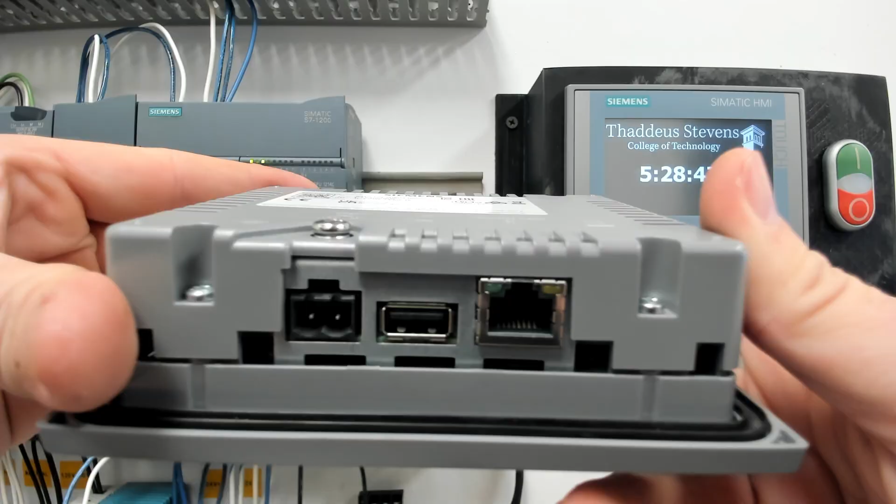So to work with this HMI, we basically need two things. We need power and we need network. The USB function is for updating things on the HMI, pulling the program off. But we need a positive and a negative 24 volts, and we need an Ethernet. So that's the wiring there. You can see I have my wiring, my 24 volts coming up to here. I also have an Ethernet cable.

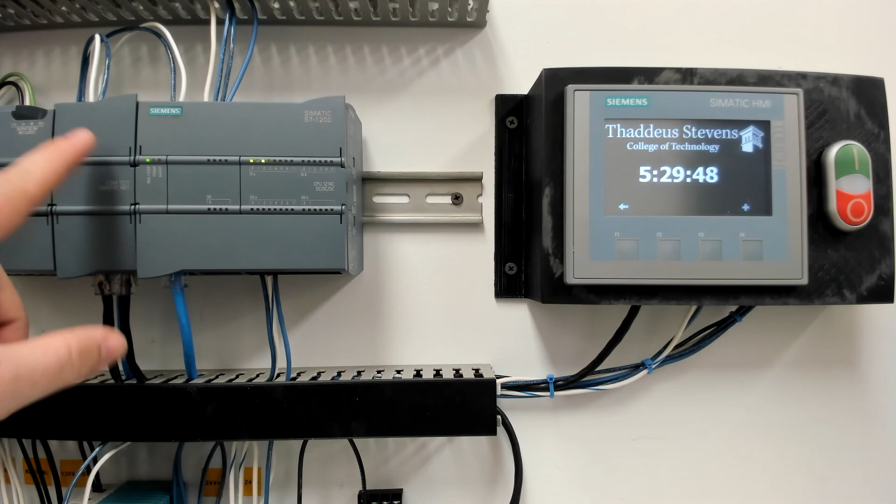You will have to have some sort of Ethernet switch, or else you'll be doing a lot of plugging and unplugging. Our PLCs we have in class only have one Ethernet port on the front of the PLC. So if you have that going to your HMI, you have no way to communicate, no way to plug your laptop in. So grab yourself one of these CSM 1277 Siemens network switches. That way it gives you a bunch of ports. You can plug your PLC, your HMI and your computer with one spot left over, and you don't have to plug and unplug everything.

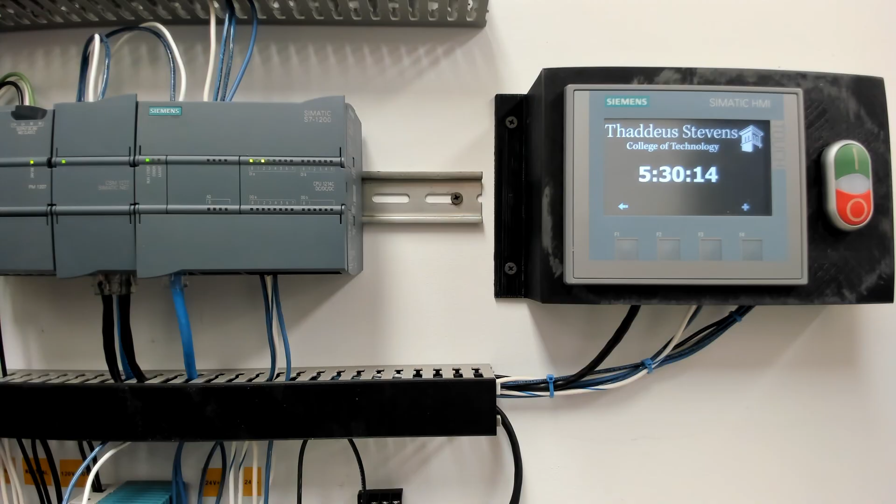So that's the wiring. So you got it wired, you have it powered on, and it pops up. Now mine is on a program that I have in it right now. We will talk about configuring here in a second. You'll see the startup screen once it's powered on, and that's where we'll get started. All right, on a fresh power up, you'll see something like this, not a program. If you do see a program, power cycle it. Sometimes in the settings, the last programmer could have set their program to start up automatically. So if it starts up to someone else's program, power cycle it, on power up, hit F1, and it will bring you to the start screen here.

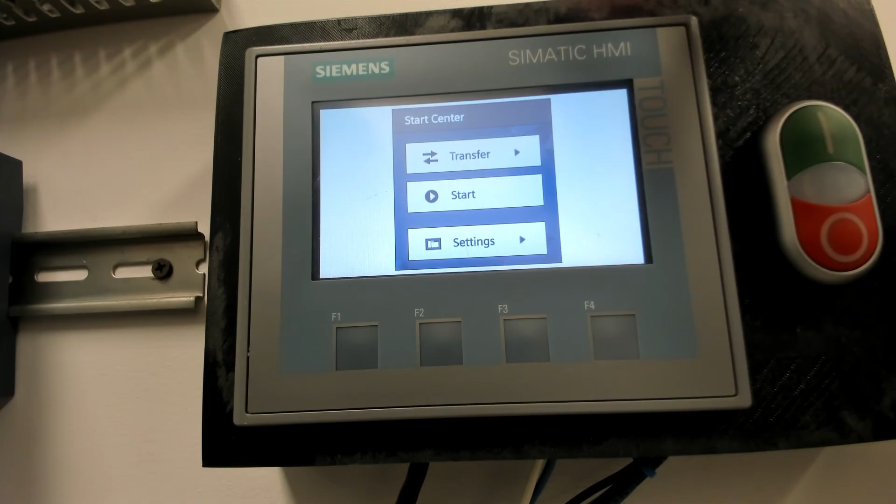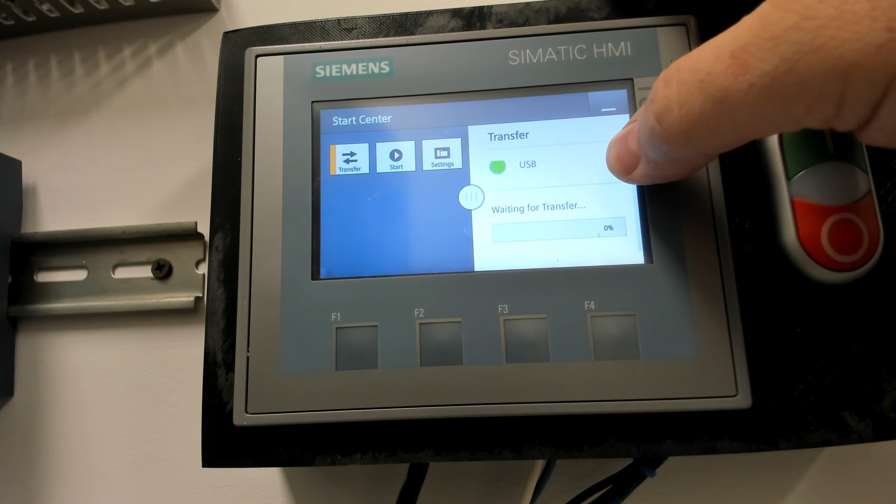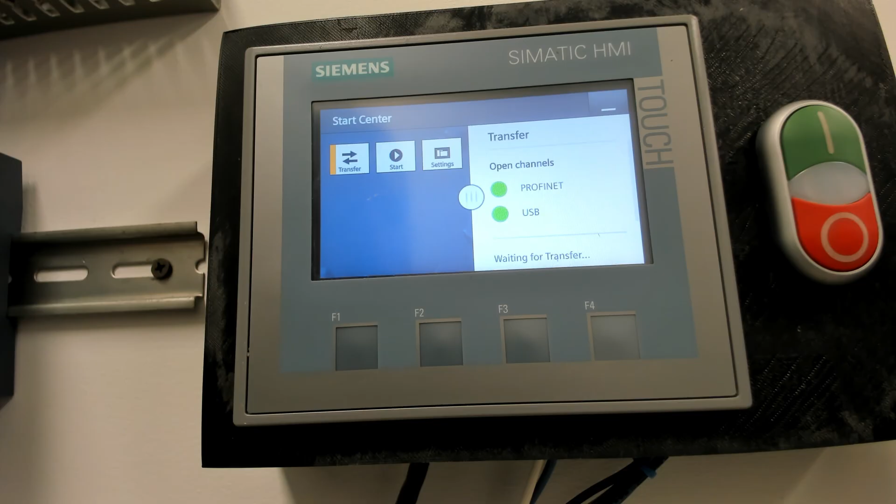The start center here has a couple options. It has transfer. This is checking your Profinet connection, so waiting for transfer. If I was to load to this HMI, I could see my program being loaded in here. I have start. Start is how I would start a program. So if I wanted to go back to my Thaddeus Stevens clock that I had on there, I could hit start and it would start running my program.

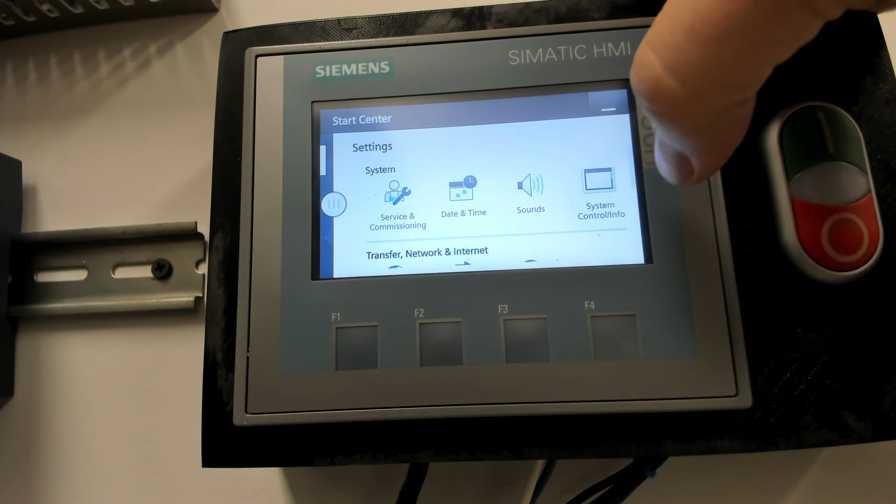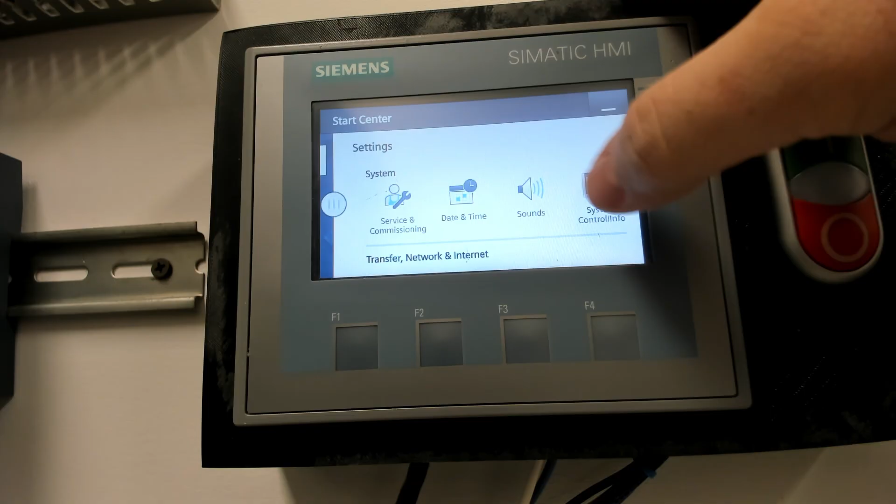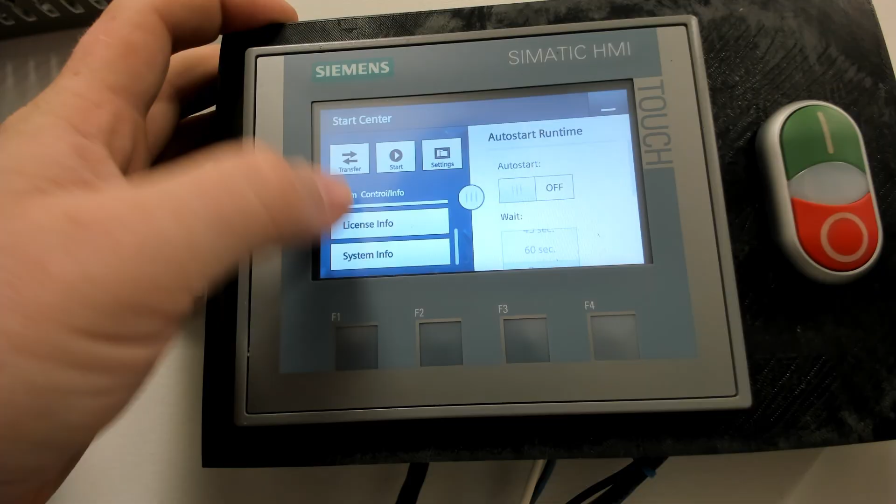And then settings. Settings are just all of the different things inside your HMI. Service and commissioning, HMI, sound, system, network interface, touch, display, screensavers, a bunch of different options. If I come to system, you can see I have a couple different options here. If you hit this, there is a scroll down right here. So there are a couple different options inside of each one. It doesn't just have autostart runtime. But that is what your HMI will be looking like on a fresh power up, something like that.

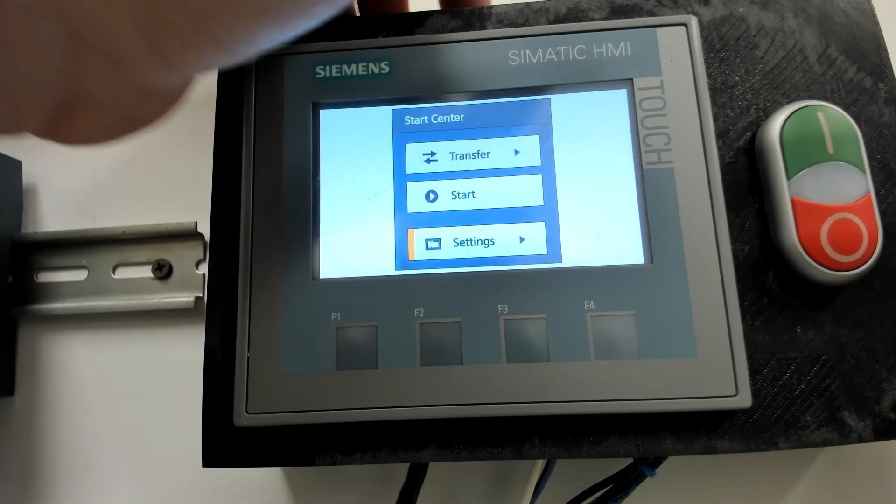All right, now we're ready to add our HMI to our program. We can't do much with it unless we can program it, send code to it, manipulate it. So I have a basic project started up here. I have added my PLC from a previous project. That is all set up and configured. We want to add an HMI. So just like adding your PLC, you come up here to new device.

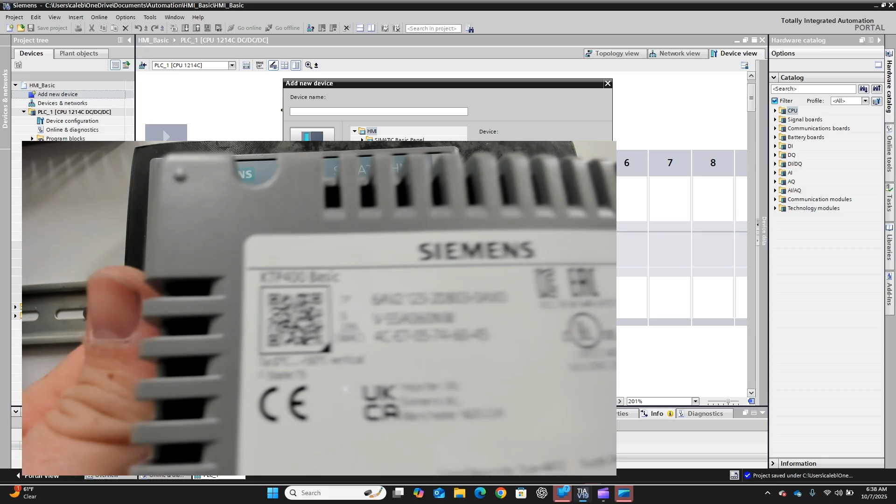And normally you're sitting here on controllers, right? Then you would come to an S7 1200, you'd find your controller. We just want to select HMI. We have that same list of different types of panels, different types of HMIs. So you may be asking now, well, what HMI do I have? So let's take a look at the back of this. If you look at the back of a Siemens HMI, the name is always right up here above the QR code, if I can get that to focus. But we have a KTP 400 Basic.

So naturally up here, it says basic panel. So I'm going to select that. Now we have a bunch of inches of displays. The display in inches is always relative to the number. So the 400, that takes me to a 4-inch display. If it would say 1200, I'd be down here in the 12-inch display. So I'm going to click on 4.

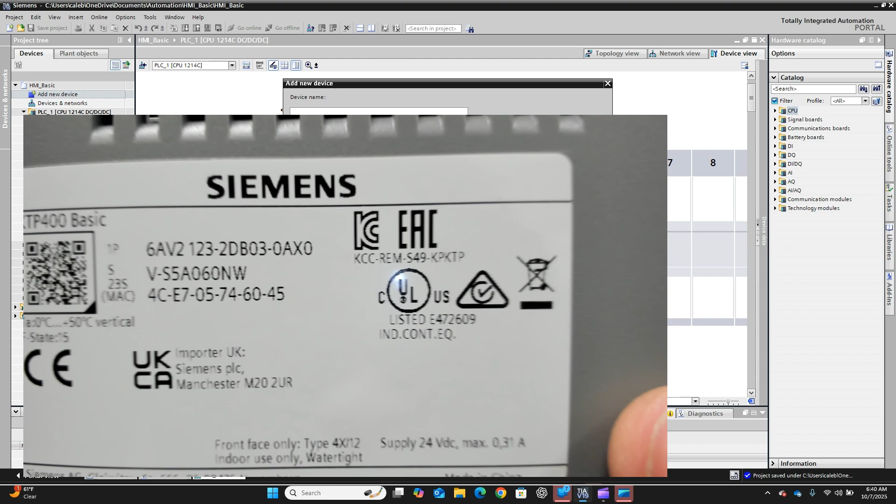We have a KTP 400 basic. I'm going to click there. And now, just like our PLCs, I have a couple different models. So if I come here to the back of our HMI, you can see my model number. I can get this to focus. My model number is ending in 0AX0. So I can come over here and I can click that. And now that is my HMI.

So the last thing to pay attention to is this version number. Not all HMIs in our classroom are on the same version. We've tried to update them, but doesn't mean we haven't bought one used or we haven't missed one. So we need to check that you're on the right version before you hit OK, or else your HMI will not connect.

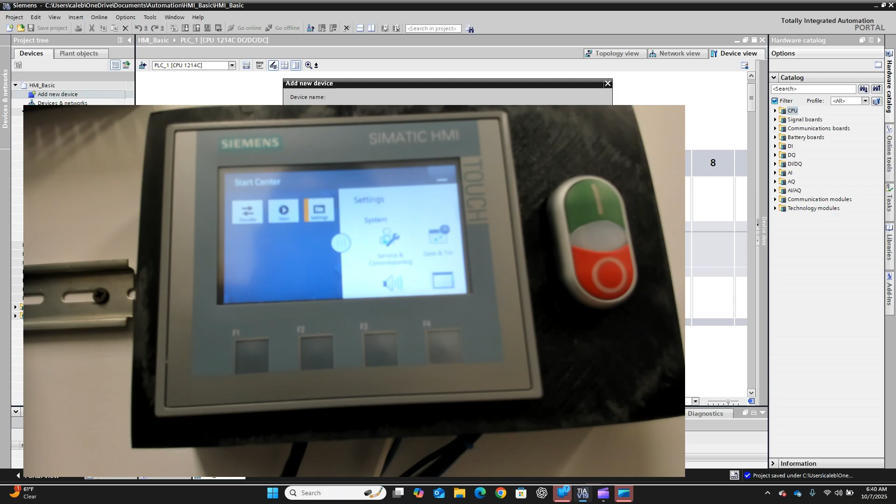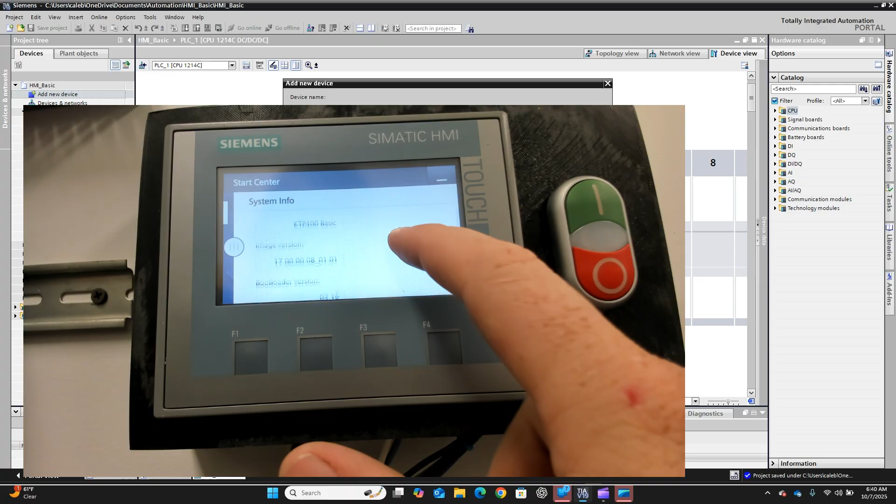So down here in the corner, if we come to settings and we come to system control and info, we have to scroll down on this list here to the very bottom. We find system info. I can make that big again. So here you can see what our device name is, and you can see our image version.

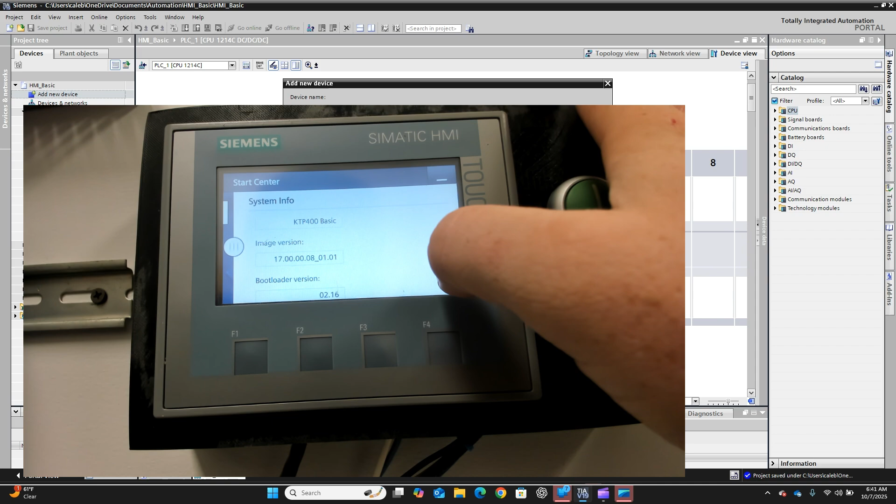So I'm on 1700. There's some numbers after that, but if you look at this list here, it's mainly what the first couple are, right? So I am on 1700. So I know that I'm on the right version for this HMI. So now I can hit OK. That will load, do its thing. Here in a second, we will get the startup screen for that, and I will jump back.

Our HMI device wizard has now popped up. This is just a quick setup for our HMI. Have a couple settings we need to connect, mainly to connect the PLC to the HMI. So you can see here on our first one, it's asking for PLC connection. Configure the PLC connection or connections. So down here, under Select PLC, I'm going to hit Browse. I only have one PLC in this project on this network.

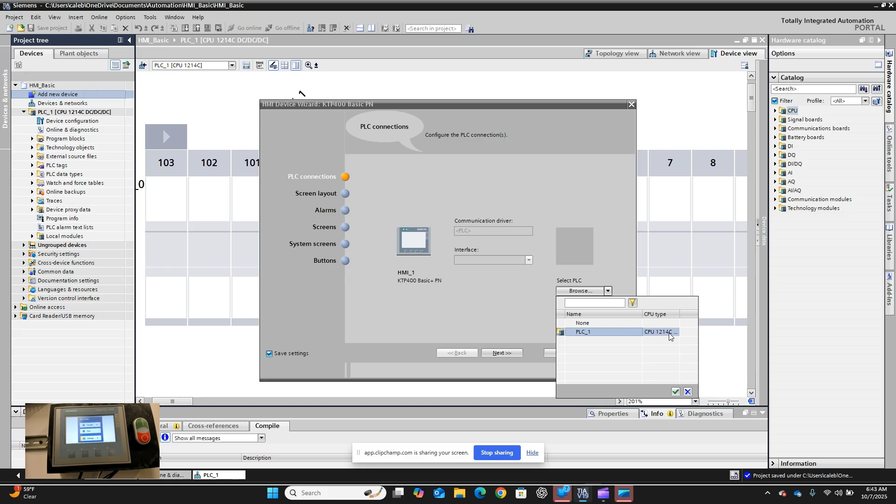If maybe we were connected to a factory network, we would see a list of PLCs here, anything that would be on the network. We're only dealing with one, so it's the first choice right here. So I'll click on PLC, make sure my CPU is the same, and hit OK. So it's made that connection there. It has configured the communication driver, and it says it is on Profinet line X1. I'm going to hit next.

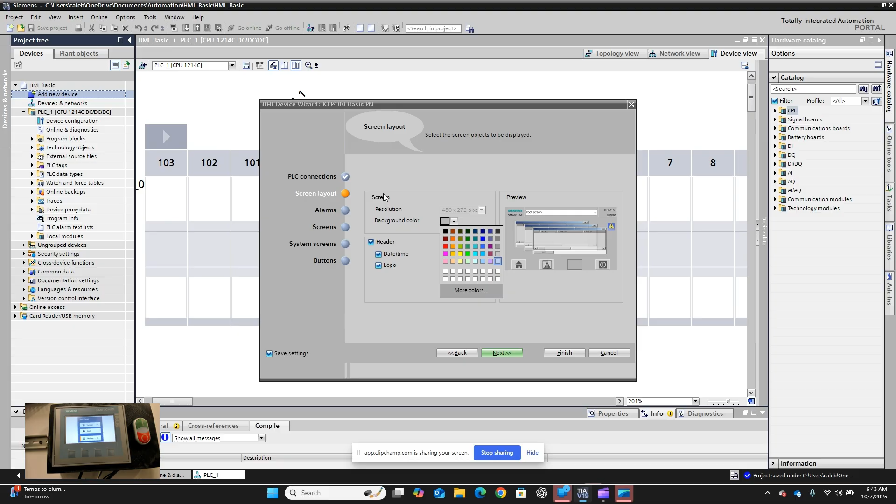There's a bunch of different options here. Most of them for your first project, we can just skip and go ahead and hit finish. But if you just take a look at things, right, so we can't change our resolution. If I wanted to change my background color, Siemens has that standard gray color. If I wanted to make my background color purple, right? So there's that. If I wanted the Siemens header on the top, if I wanted the time and date, if I didn't want the Siemens logo, right? These are all options I could check there.

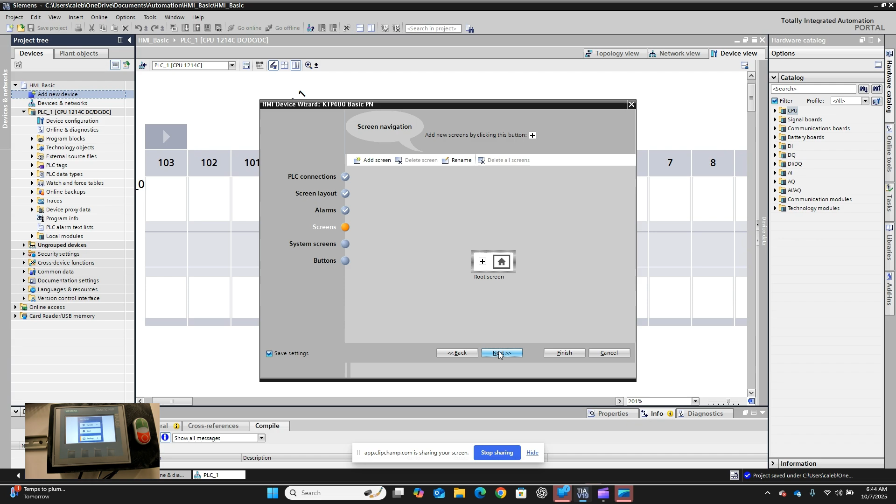Alarm screen. We won't be dealing with alarms quite yet, but these are all your alarm pop-ups. So same thing. I can turn them off, turn them on. Screens. If you know you want a certain amount of screens on your HMI, we can add them here. But right now for our first project, the root screen is good. Some system screens, we can also add some system setup screens in the same manner there.

And then some generic buttons. So system buttons across the bottom, we can add those here. But if we were the whole way back at the beginning here, as long as you make this connection, you can do all of these things at a later date. I'm going to hit finish.

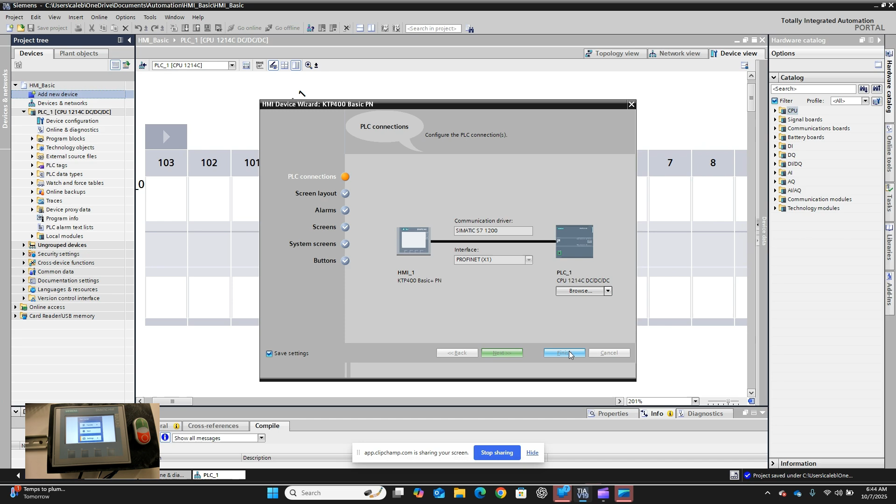And there we go. Our HMI is added to the project. If you come over here on our project tree, you can notice it just got added below our PLC. So if I minimize these, we have our PLC and we have our HMI. Both of them have drop-down menus. Both of them have tag managements, and they are connected.

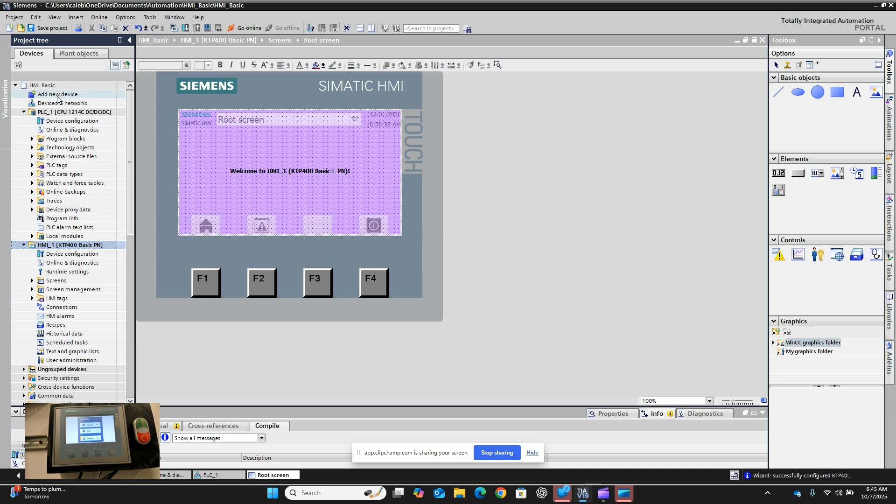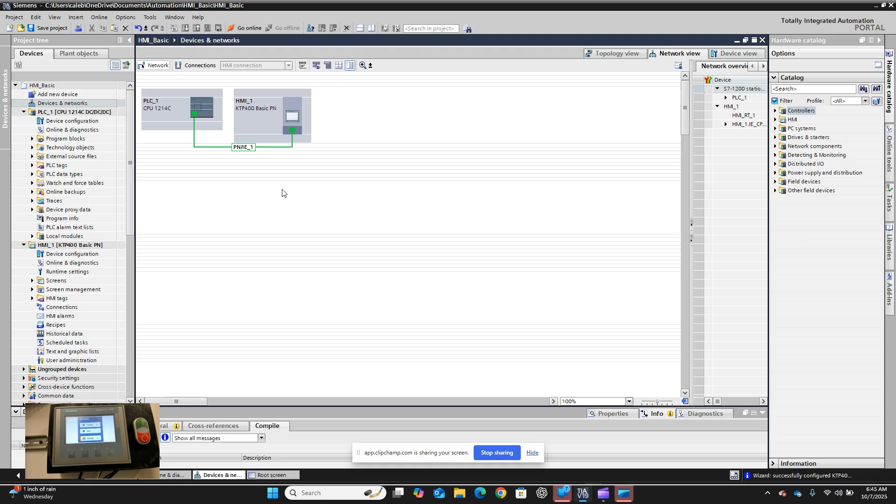If I come to devices and networks here, I should see I have my PLC, I have my HMI, and I have a green connection line between the two, symbolizing that Ethernet cable. So now my PLC and HMI are both added to the project. Let's go online and start programming.

We have everything now added in our program. Last step is to compile and download our program to get whatever we've configured onto our HMI and PLC. I am going to show the process of just downloading a blank program, but we should see our purple root screen pop up here, but the process is the same.

So one thing to notice, if you're using these buttons up here, the compile and download and go online buttons, these are active for whatever you are selected on. So if I'm selected on my PLC, that is compile and download to my PLC. If I am selected on my HMI, that is the same. So always remember where you're at.

Remember, you can also right click here and do compile and downloads this way. This is how I'm going to do it. But just remember, if you're clicked on one or the other, that changes what these quick buttons are associated with. So I've already downloaded a blank program to my PLC. Let's right click on our HMI and let's do a compile.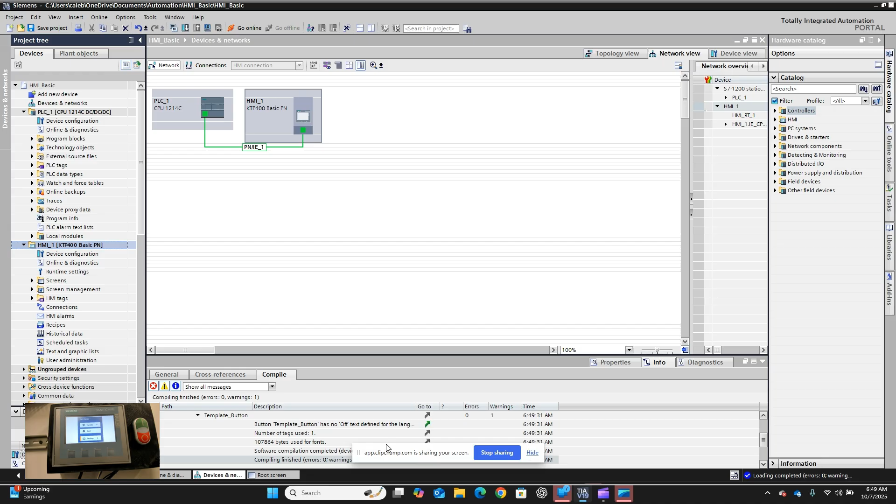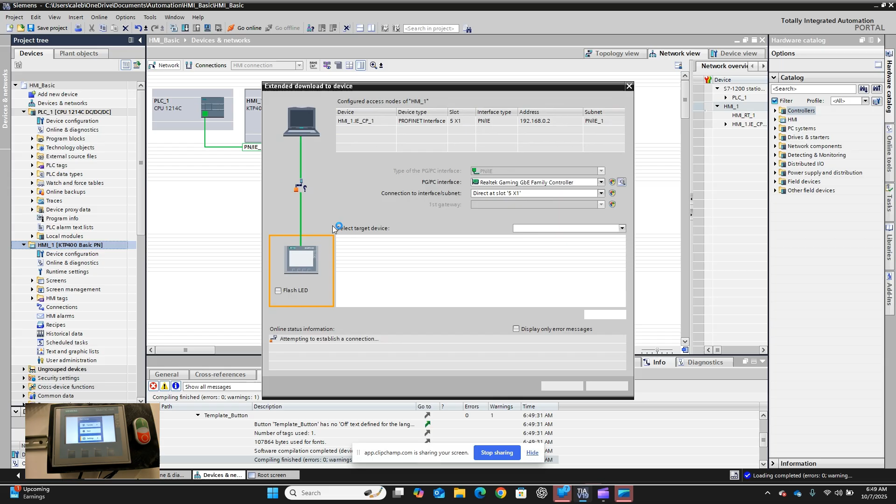So we have some warnings down here, but just template issues. We can still download with warnings. So now let's download. So let's do a download to device, software all. We get this screen right here to make this HMI connection. Our HMI IP address can be found here in our settings.

If we go to settings, we go to network settings. Oh, not network settings. Maybe just network interface. There we go. So we go to settings and network interface. There is our IP address right there. So we should make sure, now this pulled in HMI, SIMATIC HMI, but we should make sure this is the same.

By default for Siemens, the PLCs are always 192.168.0.1, and the HMIs are always 2. Doesn't have to be that way. Just normally, most of the time, it's going to be 2. So now we found our HMI. We could flash it and confirm that that is our HMI. We can see our HMI's flashing over here.

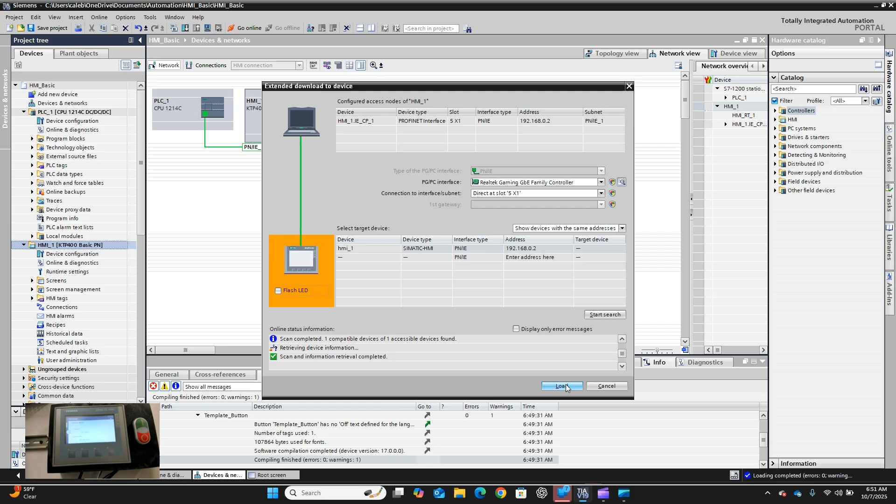And now, since we confirmed it, we click on it and we load. Just like our PLC, we get our load preview. We can hit overwrite all, overwrite if objects exist online. So if anything is on the HMI, it will be overwritten.

And then fit component with a different version installed at target device. We selected the right version. It may just be that this was 17.00001. I always just check both those boxes. Now see we have the blue, and we load.

So it looks like I have an error down here. Download failed. So looks like I have an error right here for starting this download. Let me look into it, and I will come back and explain what I found.

All right, I'm back. Got that figured out. So let's come to here. Let's do a download software all. And where my mistake was is not checking that fit button. So I clicked my overwrite button. I did not check this fit button. So it did not like when I hit fit for a more recent compatible firmware image. So I just hit overwrite and load.

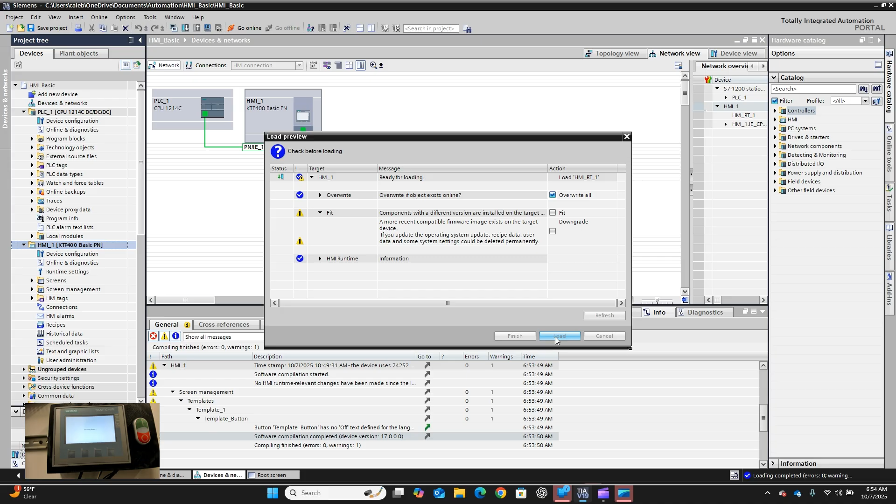And then we can see over here on our panel view, we have a blinking light for our Profinet, meaning we're starting to transfer. And our runtime is now starting. Runtime is what the file is called when you're running your HMI.

So you can see over here, we have our purple root screen with the options that are preloaded on it. It just says welcome to HMI_1 KTP400 Basic. So that is how we get started with our HMI and get it connected to our PLC. Now in the next video, we are ready to start manipulating it.